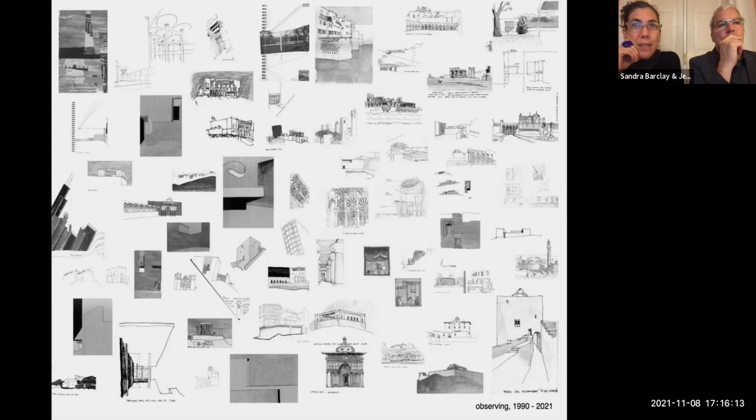Our first ingredient, that is culture, is the reason of meaningful experiences that are integrated in our minds and then arising to our consciousness when doing a project. So our long stay in Europe, we spent there 16 years, and a patient search through drawing helped us create a personal visual culture from experiencing the actual building.

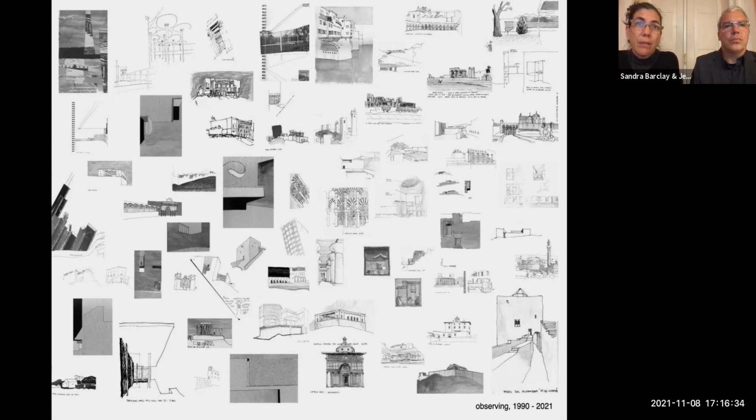So we were creating our culture, and of course the research by the doing is nourishing also our culture. In each project we go from sketches to drawings to models, to precise drawing into the reality, and then back again to sketches, models, and drawings.

So it's a circular dynamic between mind, hand, and matter. This patient search structures the relations between our projects.

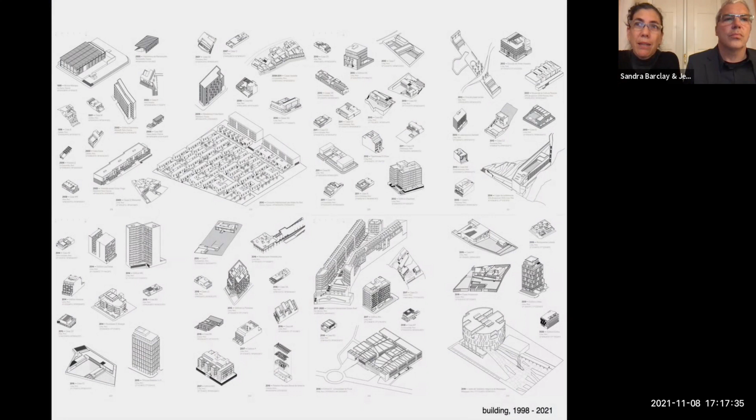The different needs and aspirations from the clients, the nature and scale of the program, the singularity of geographies, climate, and places are essential to an approach that seeks to blur the boundaries between the vast territorial scale and the small detail of an architectural element.

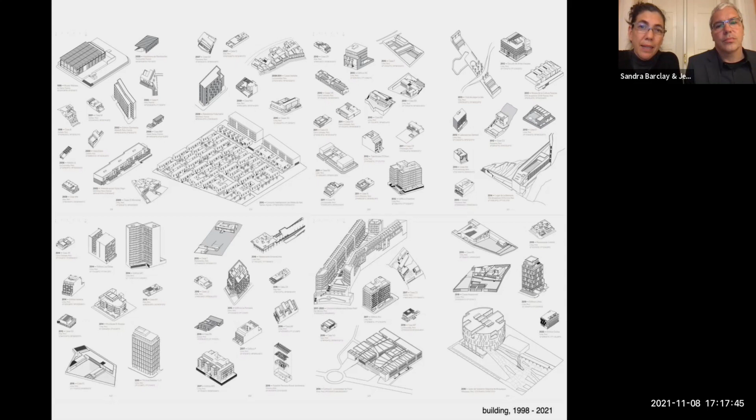These drawings of our built projects, shown at the same scale, constitute our own design culture. We are increasingly asking ourselves if nature, territory, landscape, and architecture can still be seen as interdependent and with the same value. We try to abandon the modernist, rigid separation of the disciplines of architecture, urban design, and landscape architecture, which have become distinct and often polarized professions.

Alexander von Humboldt was the first European to realize that the section, and not the plan, is the only way to understand the Central Andes region, where modern Ecuador, Bolivia, and Peru are located. In Peru, the combination of the Andes and a cold current coming from Antarctica produce a unique tropical landscape.

So we will redraw this section, including the sea current named after Humboldt. We start by a horizontal line that represents the ocean, the west on the left, the east to the right. Then comes an extremely steep topography with a 10,000 meter, or 30,000 feet, gradient in a distance of only 200 kilometers.

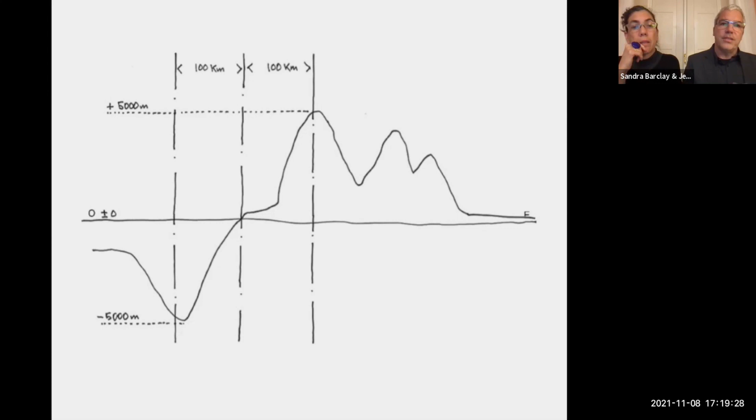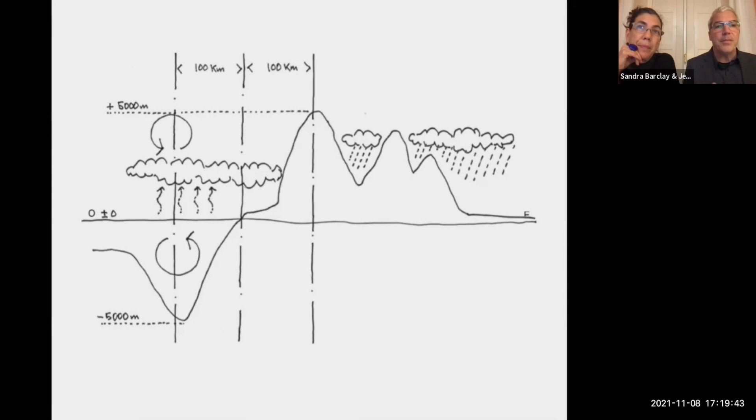These geographical circumstances generate a unique landscape and a unique climate. In the Amazonian basin, at right, climate responds to a normal tropical condition, while at left, in the Pacific basin, a permanent mild temperature and no precipitation at all happens when the seawater convection and an air thermic inversion combine to create an almost permanent cloud over the coastal desert strip.

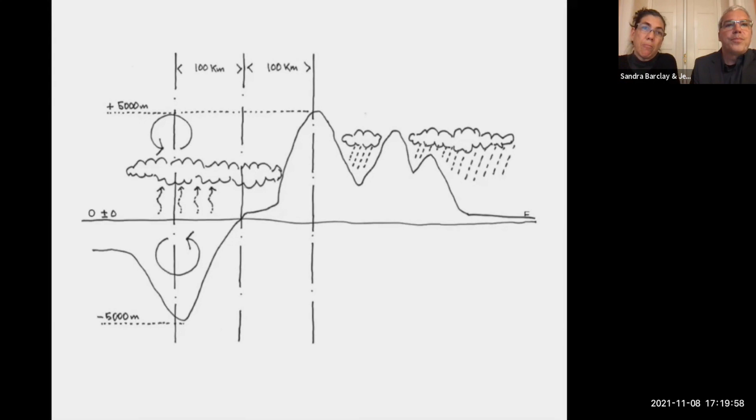And Lima, our city, is placed right in the middle between the abyss and the summit, which we feel even if we don't see them, because of the ocean, of course, and the almost permanent clouds that hide the mountains. We'll show you seven projects that are linked by this section.

They can also be understood by their own section, and we will try to explain them by the sections, because we like to think that if the plan allows to understand distribution of spaces, only the section reveals the wonder of space, light, and time playing together.

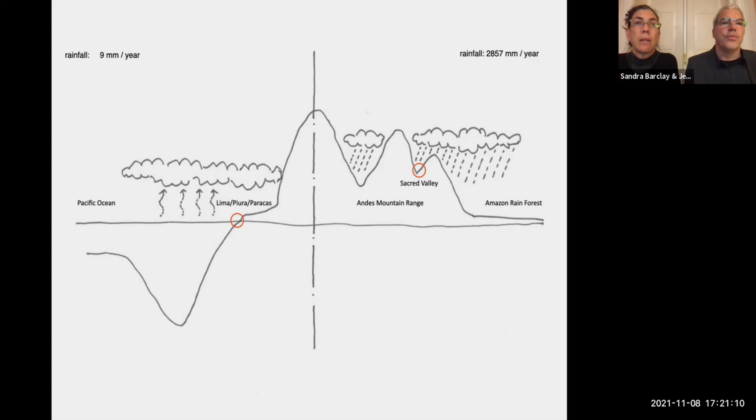So these conditions of this section make our tropic very different from the usual image we have of this latitude. Instead of, in the coast where Lima is, instead of palm trees and white sand beaches that we expect from a tropical setting, we have this extremely arid, but at the same time, yet very humid desert.

And these conditions generate a very mild climate. That is our third ingredient. And climate gives us huge opportunity for redefining architecture and its role of providing shelter. With absence of rains, extreme hot or cold days, no strong winds, we can concentrate our efforts in the architecture's capacity of being generous despite budget limitations, and in the creation of intimacy and well-being.

Space expands beyond the limits of the building, and interior and exterior are not defined by airtightness, but by the relationship between intimacy and vastness.

It is on the edge of the Bay of Lima where we had the opportunity to build the Place for Remembrance. This project is about making a place for reconciliation of Peruvian people, a cultural center that would articulate the efforts of an entire generation to convey to future ones the memory of 20 years of extreme violence that devastated our country and left more than 70,000 deaths. This place has become vital in the aspiration to prevent repeating the errors of the past.

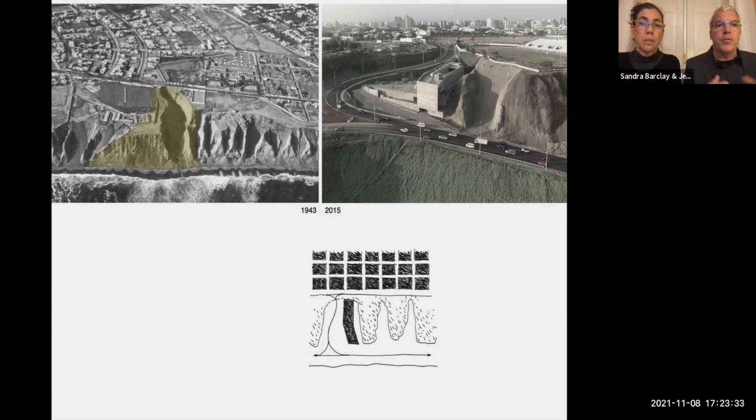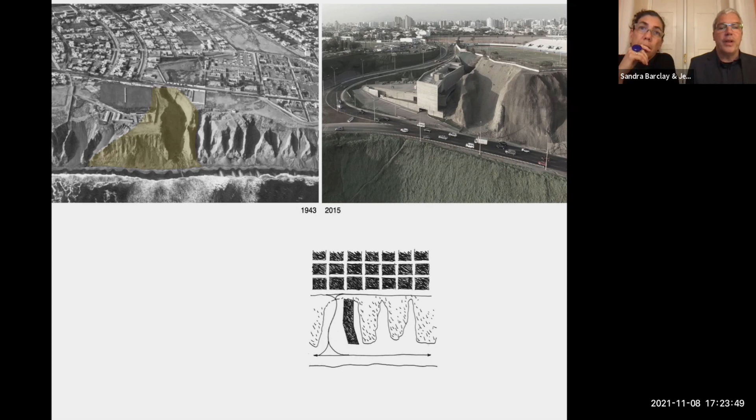The site where we had to intervene was a residual area left by the destruction of one of those successions of cliffs and ravines that characterize the Bay of Lima, when the roadway you see at right was built to connect the beaches with the city. We decided to embed the building within this territorial logic by building an artificial cliff, so our addition would be related to the memory not only by its programmatic content, but by the memory of Lima's landscape. In fact, the building closes a sequence of cliffs and ravines more than 10 kilometers long that characterizes the Bay of Lima.

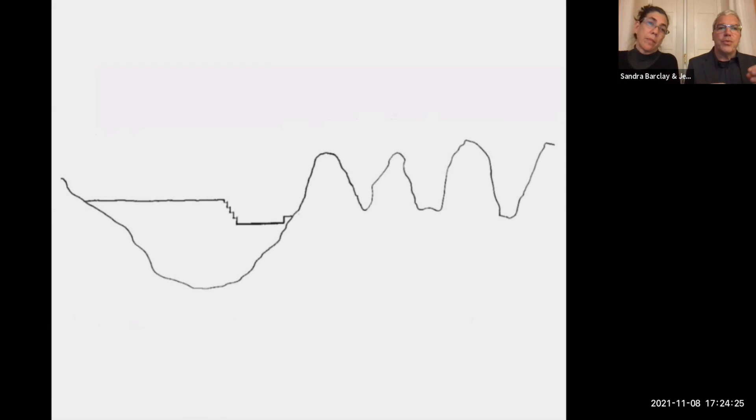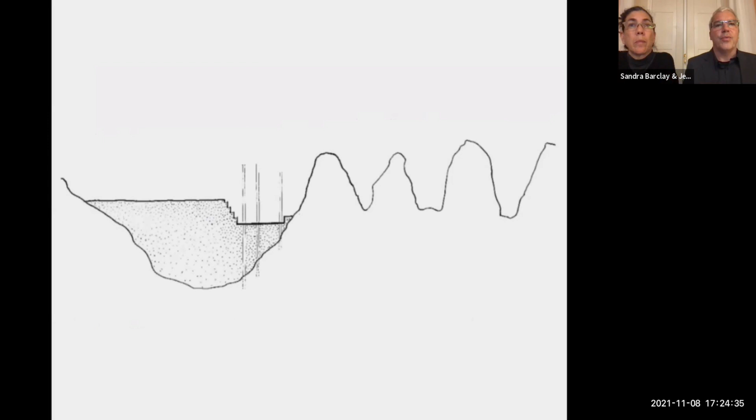That territory is more easily understood by a section, as Humboldt showed us, so we'll explain our project by this section. We drew a cut-off longitudinal section of the cliffs and can visualize the infill made to create the descent to the beach. So we decided to do a compact building near the natural cliff, which allows us to economize on both the number of foundation piles and their depth. In this way, the territorial logic could also meet the economic logic.

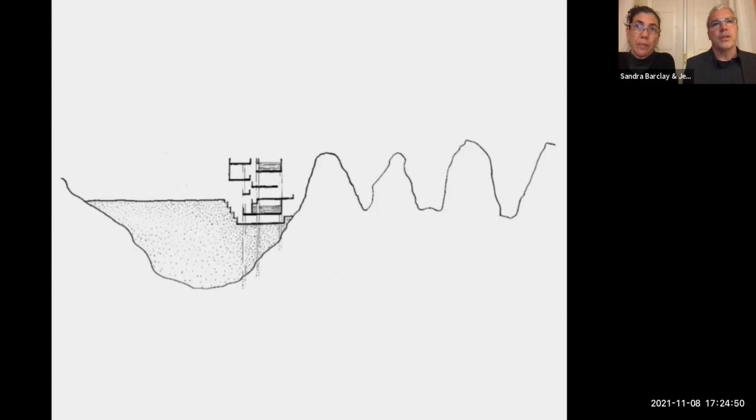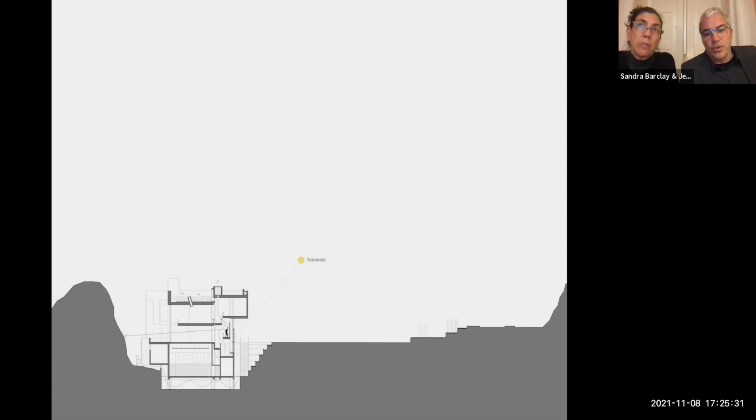This simple strategy opened possibilities for responding to environmental needs. Opening the building to the cliff allowed controlled natural lighting, while closing it to the northwest prevented the sunlight of the setting sun and the noise of the coastal highway. So an open inner space could be created and would function with natural ventilation, limiting the use of air conditioning to the auditorium alone.

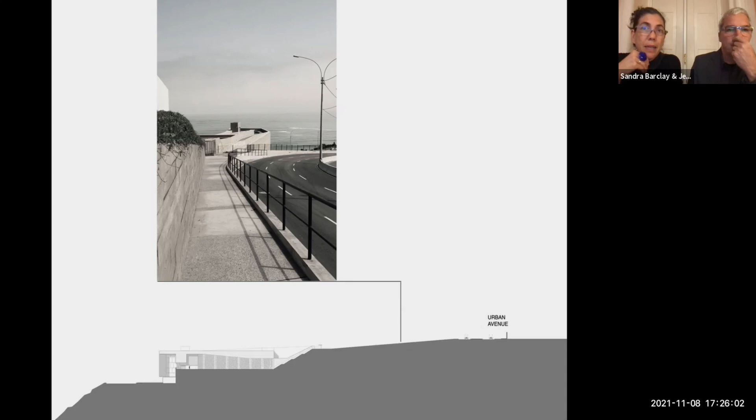The site still had a strong handicap: there was almost no connection to the city. A long distance separated the site from the main urban avenue with public transportation. So we decided to transform this major problem into a design opportunity. We created a narrow passage to introduce time in the way we approach the building. The visitor can take the time to distance himself from the city, leave daily preoccupations behind, and get ready for an exhibit which is not easy to see.

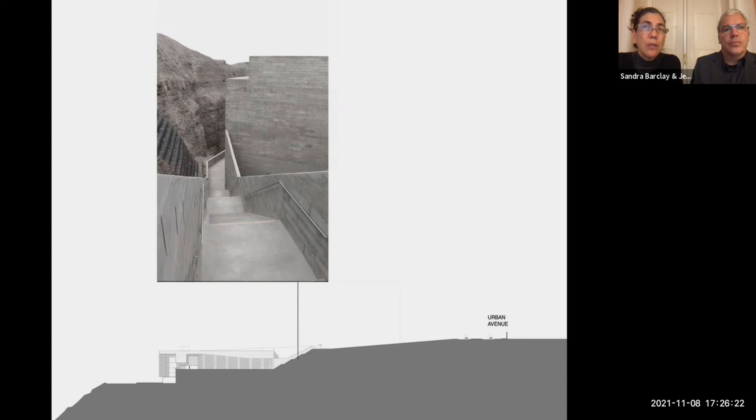The visitor is really submerged in a gap created between the cliff and the building. The act of descending into this crevice turns gravity into a very explicit force, and at the bottom of this newly created ravine there is a marked physical consciousness, a kind of intensified presence. We are no more in an urban setting, nor in a natural landscape.

On the other side of this artificial cliff, the building is defined by a platform that looks over the sea, conceived as a public space for reconciliation.

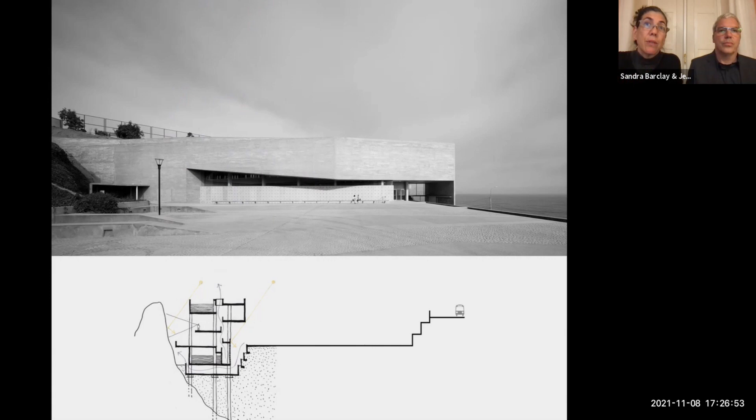The program, our fifth ingredient, isn't of course a list of functions, but the way usage can inform space as a container of experiences. So the experience of space through time is essential while we walk through the building.

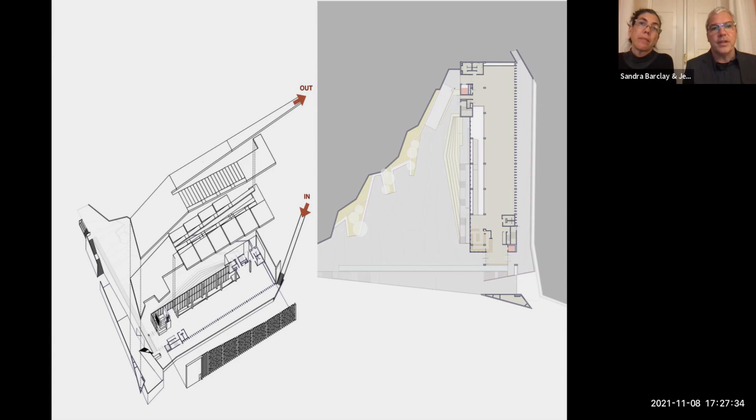The different exhibition spaces are accessible through a series of ramps inside this very rational building, climbing from the bottom of the ravine up to the rooftop, where visitors go back to the city. So in this museum, the hall and gift shop are not the meeting point between those who get in and those who get out, but the city itself. It was very important for us to do that.

The ramps also helped to slow down time in the interior, separating the path of the eyes from the path of the feet, so we can have a complete vision of space while climbing. This way, the experience of space in time is enhanced.

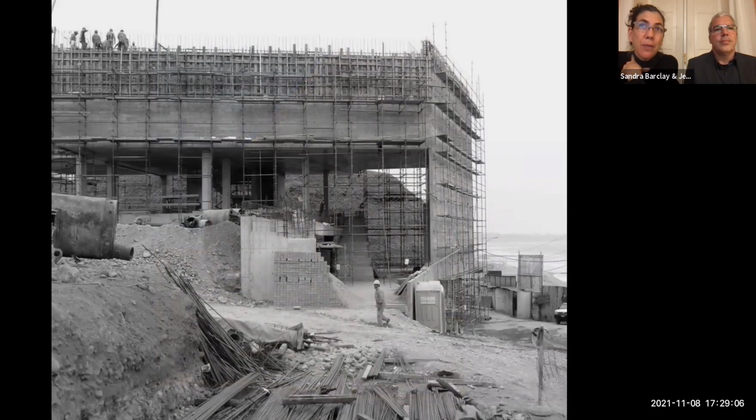Technology, our sixth ingredient, is defined by what's available in the place we are working. Craftsmanship and limited resources are what we have at our disposal, so it makes sense to combine them, making the handmade imperfection our ally. The building process is therefore very important, as the design process does not finish with construction drawings, and the act of building is also an act of memory.

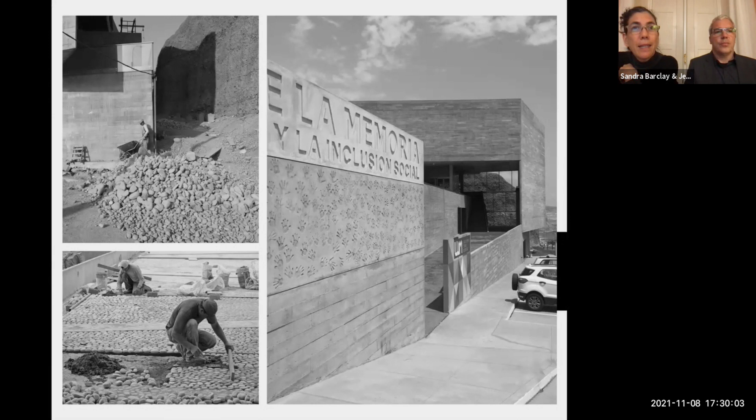The artisanal formwork assembled by hand using old wooden planks, the cobblestone pavement, and the traces of handcrafting are evidence of human labor and become the memory of human intervention. The workers put their handprints at the entry to the public plaza as a tribute to the hands that literally built this place. Now let's see how the building becomes alive.

Sun from the east warms the house in the morning, while the setting sun at right hits the stone cladding of the roof and diffuses heat at nighttime. So here we can see the terraces, the roof, the framing of the lower part of the valley.

Not far from there, in Moray, we won an international competition for designing an agricultural research center and lodging. Moray is considered an Incan agricultural laboratory for adapting plants to higher altitudes. This was for us an opportunity to propose a research center that would focus not on agriculture itself, but on managing water resources in the era of global warming.

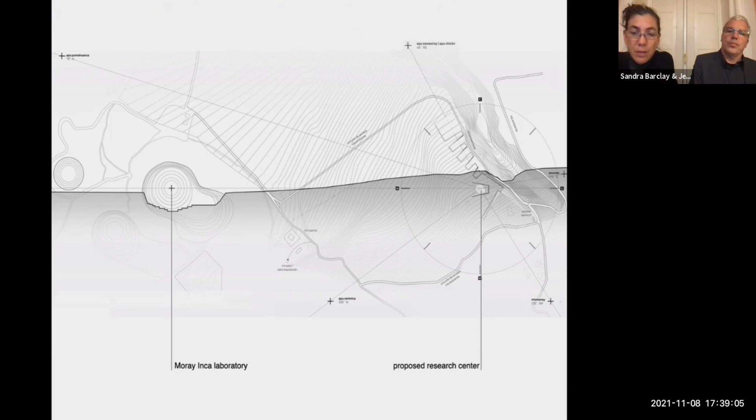So we decided that the project should follow the same strategy the Incas employed, taking advantage of the environment and orientations to create favorable conditions for life. At left, we have the Moray Inca Laboratory, and at right, we have this ravine and our proposed research center at the edge of it.

So we downscaled the ancient infrastructural systems for water retaining, such as infiltration canals, reservoirs, and terraces, to the architectural scale in order to collect water and use it during the dry season. The combination of the different systems defined the intervention on the site.

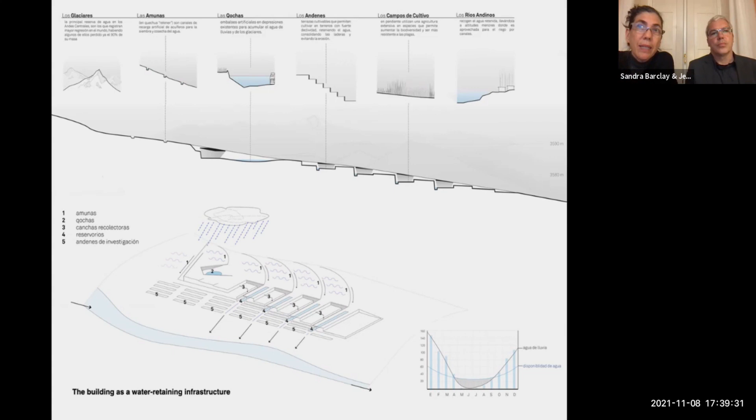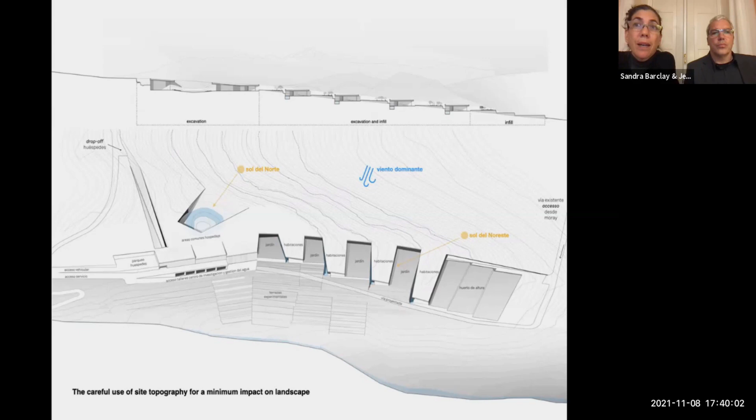A careful use of the site's topography, combining excavation and infill, which we can see on the section in the upper part, allowed us to take advantage of an existing ravine and slope for bringing natural light to all spaces with minimum impact on landscape. The laboratory has a view over the ravine, and the social areas gather around a water reservoir, or qocha, as we say in Quechua.

So let's go back again to the other side of the Andes, to the Paracas Desert, one of the most arid deserts in the world, but also, unsurprisingly, inhabited for centuries. Paracas people lived there like 2,000 years ago, and were the predecessors of the Nazca people, the ones who traced the famous Nazca lines.

The Paracas Archaeological Site Museum was destroyed by a strong earthquake in 2007, and the European Union financed its reconstruction and launched an architectural competition the following year. We had a very meager budget and a sublime landscape as the main ingredients for this project.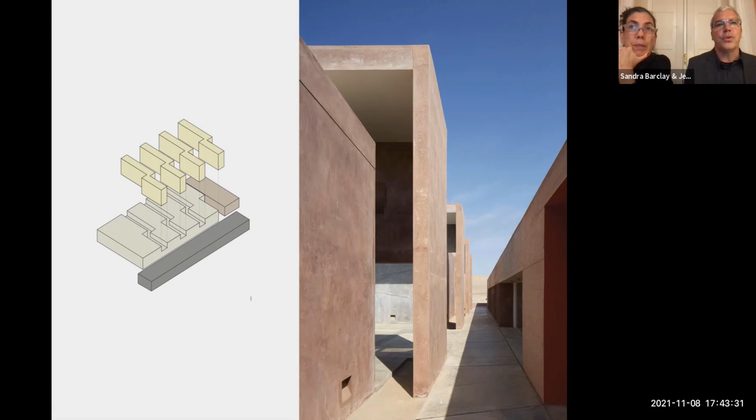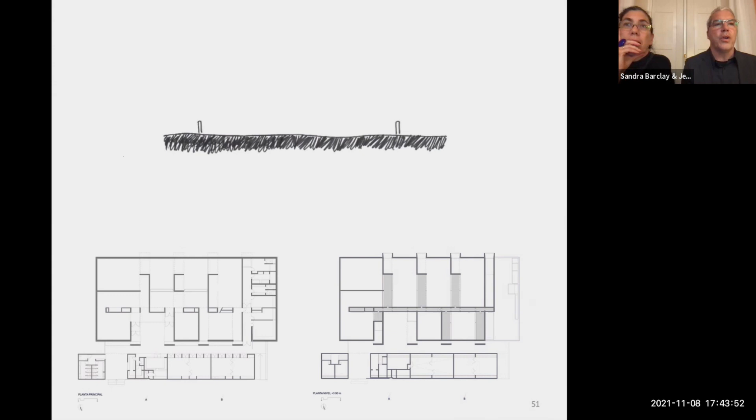So a single-story building has a rational plan and a labyrinthine space common in pre-Columbian architecture. In the plan, you can see the gray suspended structure that we call the environmental device. These elements define the roof, considered a fifth facade.

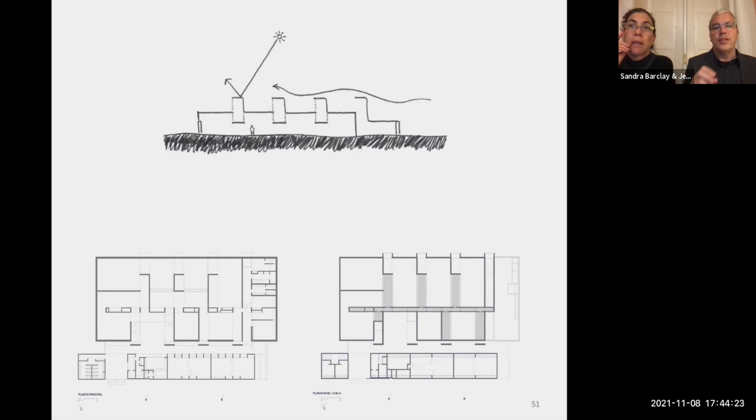As an element, the roof can protect us from the sun and the strong winds of this region. Finally, a series of low-tech environmental devices find their place beneath the roof and help define the exhibition spaces. They help control natural light and ventilation, and will be able to receive more technological equipment if necessary in the future.

This museum is in a very remote place, and it has no artificial lighting at all. So when the sun sets, they close the museum. So a big effort should be done to have the right amount of natural light for the exhibition.

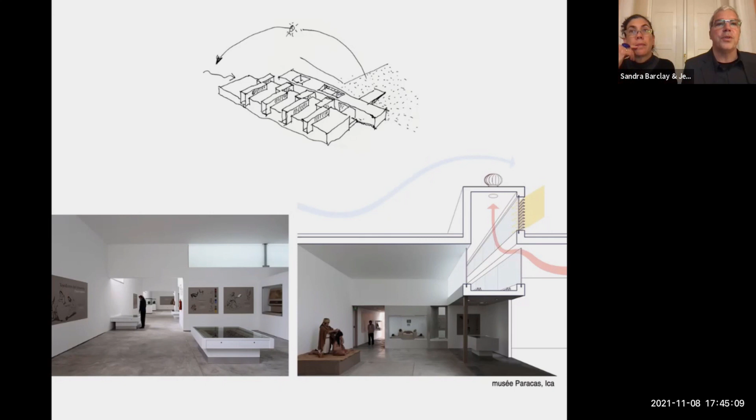The devices are also structural elements, and when they reach the southern facade, they become windows that are framing the burial sites. The exterior is finished with the same polished ceramic technique used for finishing pre-Columbian vases, rescaled to the size of the building.

We used a natural reddish cement that is pozzolanic, and we hand polish it as if it was a huge ancient vase. This color is obtained only by the color of the cement, which has a lot of ferrite, and it oxidizes, it rusts with the air, so it acquires this magnificent color.

So in a climate where rain is nonexistent, circulation can be open air, intermediate spaces that flow between volumes. The same strategy can be applied to an urban house project, and in Lima, we did it. We were asked to design a house in a typical urban plot, 15 meters wide and 35 meters deep.

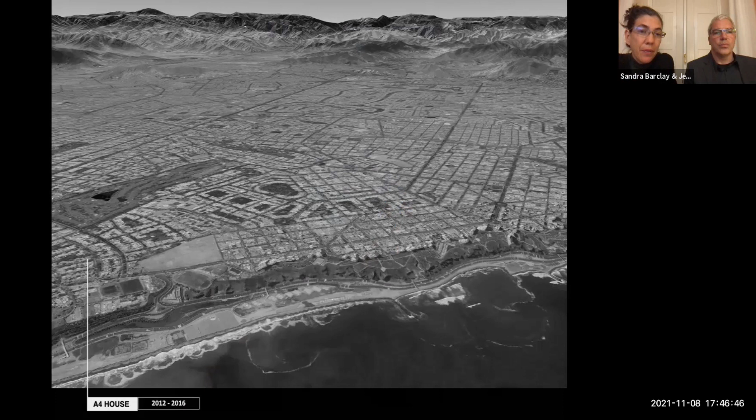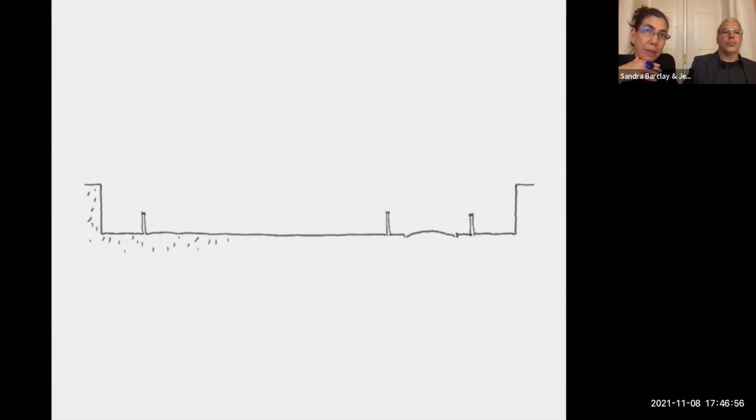We decided to create our own landscape in the confined space of the plot, with the back neighbor at left and the street at right. We then defined the limits of the plot, mandatory in the urban regulations. We introduced open-air features such as a pool at left, a pond at right, and gardens planted with trees.

In between, a series of 3 vaulted bridges spread over the width of the plot. These bridges sustain the program of bedrooms and intimate spaces, leaving the ground floor completely fluid and open, revealing the microcosmos within. So from the street, the house doesn't reveal its interior.

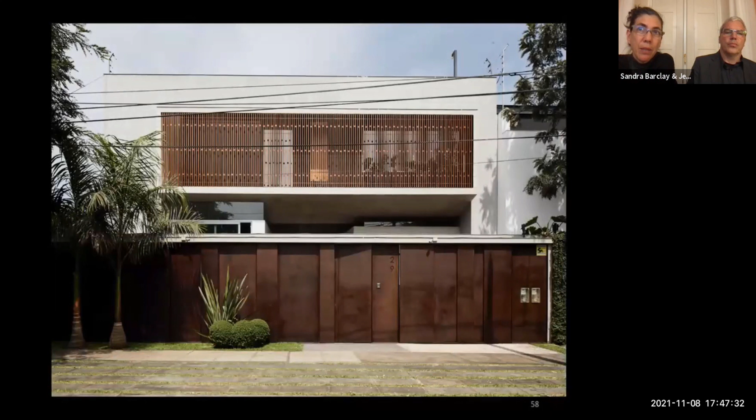The first vault bridge acts as a threshold between the street and the interior landscape. Once you cross it, space suddenly unfolds. We discover a world where interior and exterior blur with reflection and transparency. The space expands through the vaulted bridges, liberating the boundaries between house, garden, and pool.

Living spaces unfold seamlessly between gardens, while on the second floor, the vaulted bridges are linked by suspended metallic walkways. So this is the last exterior space.

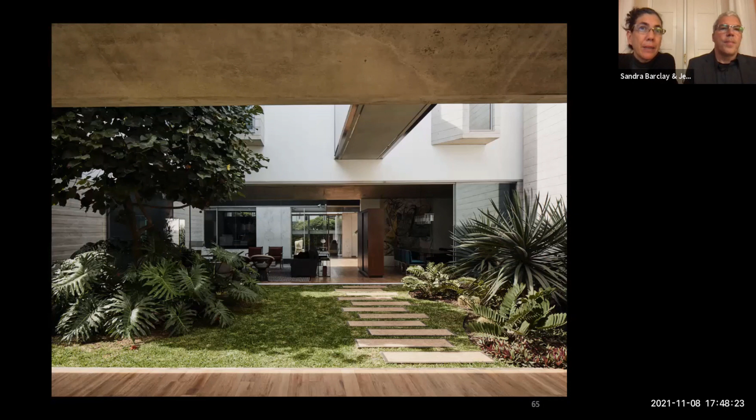Not far from here, we were asked to design a restaurant where we were told to do a project that would synthesize Lima's architecture paired with very good Liman food. So the strategy was similar.

We thought these aspects of climate, of absence of rain, gray sky, should be at the core of the project, taking into account also the noisy Metropolitan Avenue crossing the neighborhood.

So the typical introspection of colonial and pre-Hispanic residences, and their lighting and ventilation devices, were very useful for this project. Enclosure helps to create here a quiet place.

5 modular volumes are supported by the enclosure, organizing a series of indoor exterior spaces. The modules host different functions, and the spaces in between create a fluid space where a more informal atmosphere is proposed.

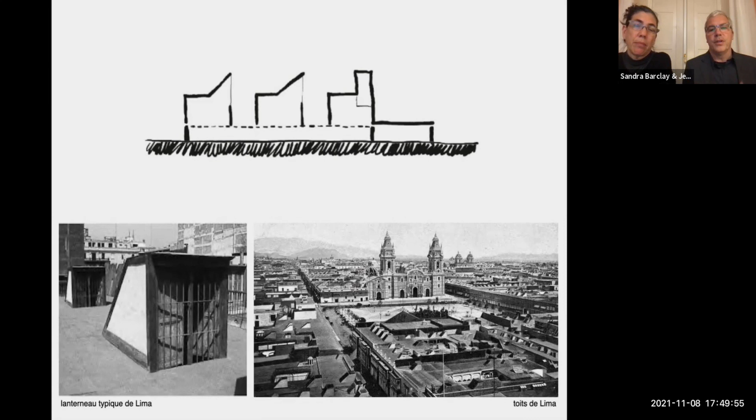The intermediate space is alternately compressed and expanded by the asymmetric arrangement of these 5 modules, producing the quality of an intimate urban space, or as we call it, the exterior indoor, where Lima's white sky becomes like a ceiling.

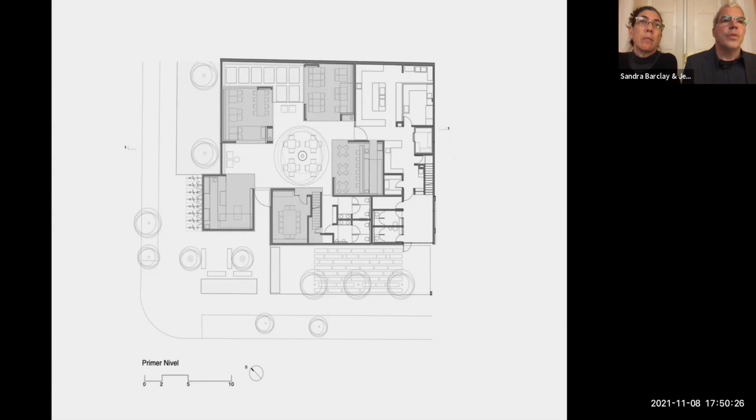From the street, the building appears quite opaque and introverted, and only the skylights give us a hint of what will be discovered inside.

And we get in by a gap between 2 modules, leading us to a protected indoor exterior, as we were saying.

Each module defines a precise space, a different kind of culinary experience. We sit differently in each place, but at the same time, all of them open up and merge with a completely open exterior space.

And when asked for designing a lecture building in the Peruvian Northern Desert, we found it was relevant to apply this discrete building scheme and bring it to a very different scale and with a very different intention.

In the city of Piura, 1,000 kilometers north from Lima, and only 4 degrees south from the equator, the local university needed more space for welcoming a new student population from low-income rural backgrounds, able to pursue their education thanks to a government scholarship. In 2015, Piura University accepted 700 of these students, so new facilities of generic classrooms and faculty offices were needed. Their aspiration was to take this opportunity to improve teaching infrastructure and go beyond a standard response to this need.

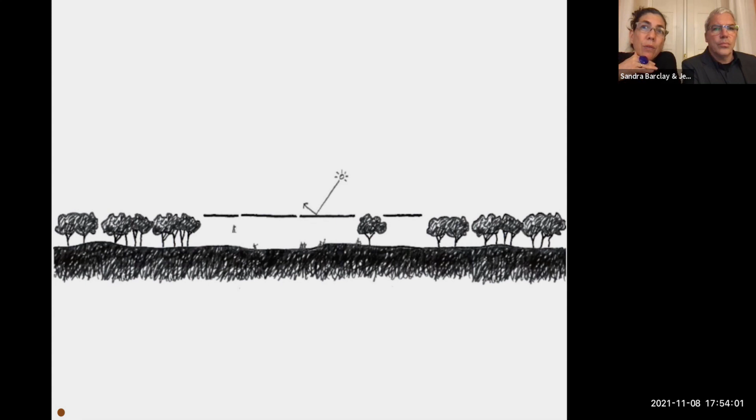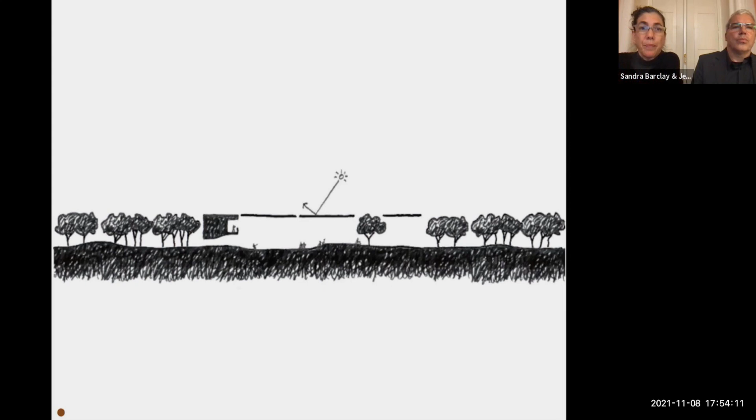Again, the section can help us understand the project. So we start drawing the soft hills of the tropical dry forest, then the planted carob trees, and the clearing left for future buildings. We start by extending the shade of the forest at the place of the building. A single horizontal line is created to define a shaded space capable of creating good conditions for learning. Then the program grows, as in La Tourette, from the rooftop down to the ground. The result is a series of buildings which are less important than the spaces left in between them.

So these are the places for informal learning, the creation of non-hierarchical in-between spaces for students to study, eat, connect, and discuss together outside the classrooms, contributing to create a sense of community.

And we had these two very different populations of students that we had to deal with. So for us, social and economic boundaries should be blurred between the newly arrived rural students and the local urban ones. That space was the space in between buildings.

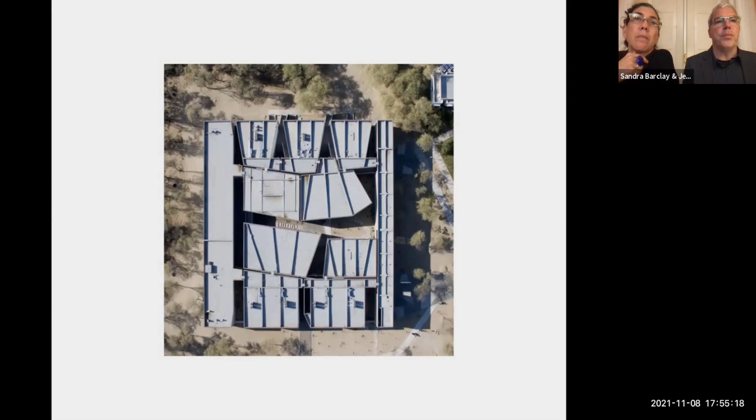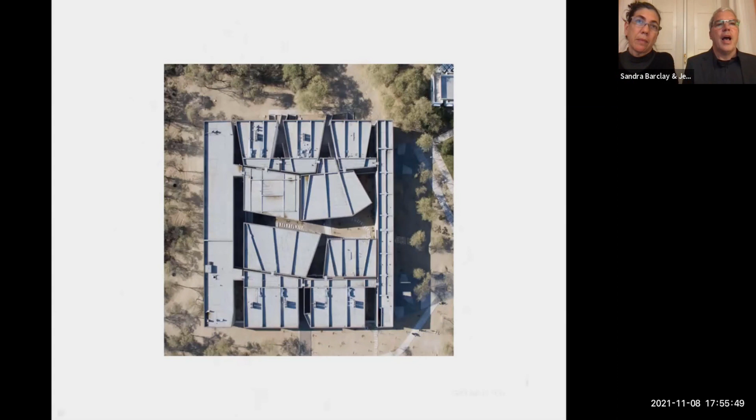As in the dry forest, where the single tree is not more important than the whole, 6 different building types form 11 independent structures disposed in a regular volume of 70 meters by 70 meters and 9 meters high. This apparently compact scheme shelters a permeable shaded space.

Each single building responds in shape and form to its use as an amphitheater, a workshop, a faculty office. And the regular functional shape defines at the same time a multiplicity of irregular in-between spaces.

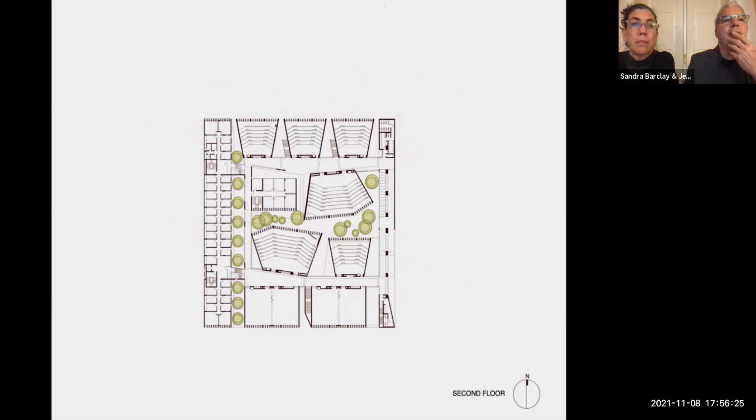Being perfectly oriented to the cardinal points, the natural cross-ventilation from the southern winds makes air conditioning unnecessary, therefore reducing energy consumption. The complex is also not only permeable to the wind, but to the people, and has access from 3 sides, so that it becomes a shaded crossroad in the campus.

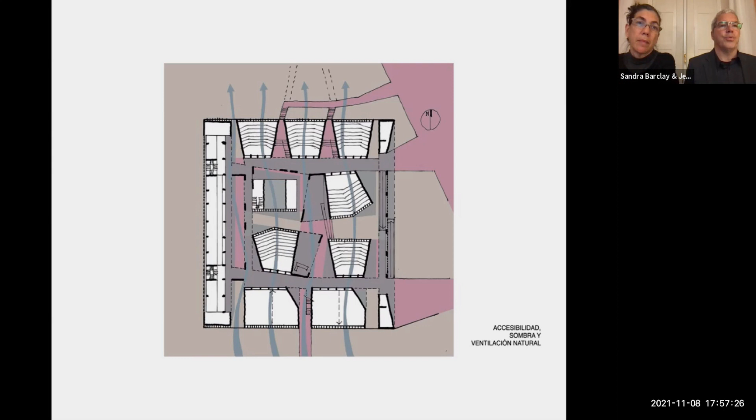Today, at a given time, almost 40% of the people in the complex don't have classes in it. So it has become a place to stay, to meet other people, and have informal conversations. We were inspired at the beginning by the forest, but it has become, in fact, a busy urban space in the campus. Following the logics of an oriented building, the south and north sides are protected by vertical louvers, which are very efficient to protect both facades at this latitude.

In the west facade, a system of prefab concrete panels protects the faculty offices from the setting sun. And the east side building faces the access from the campus pedestrian pathway and hosts the ramps that connect both levels.

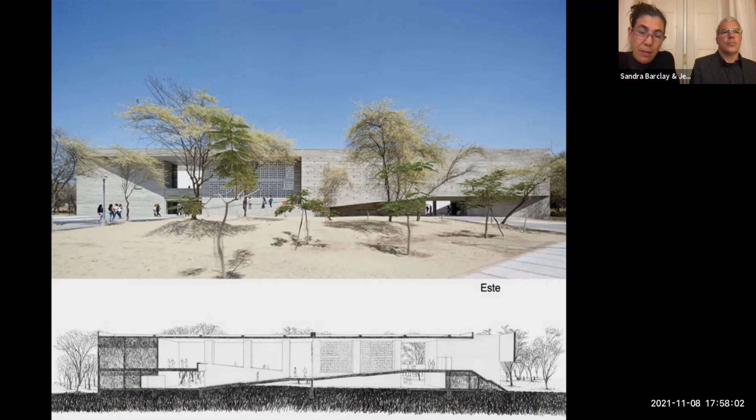The entrance building is in fact a threshold where we pass from the strong glare of the equator to the shaded exterior spaces of the learning landscape. The lattice shuttering, these concrete prefab panels, serve as light modulators in order to accommodate our eyes to the shaded half-light spaces while we go up through the ramps, through the stairs, or just entering the building.

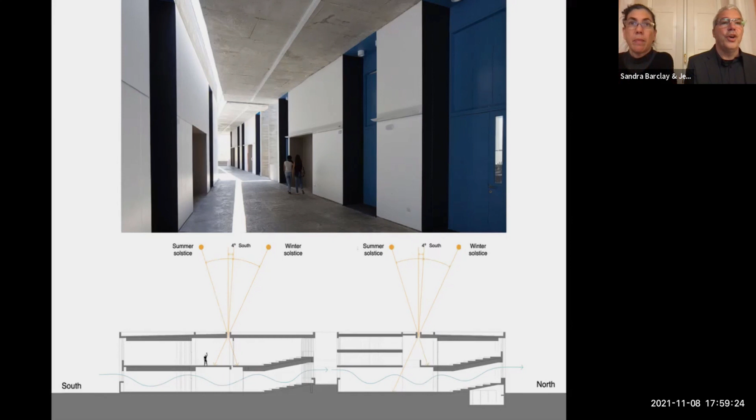And the narrow gaps that single buildings leave between them help the light come into these exterior-interior spaces and favor natural lighting and ventilation. Because the building is oriented with the cardinal points, the gaps are also oriented, and the ones oriented east-west are in fact calendars that register the sun's inclination throughout the year, while the others, oriented north-south, are sun clocks that register the daily movement of the sun.

There are, all through the building, spaces where people can gather, rest, or chat in between classes. Spaces are modulated to favor different kinds of gathering, even an informal class. As we get into the complex, these spaces become more important until we arrive at its core, where the intermediate spaces are crossed by a stretch of the tropical dry forest.

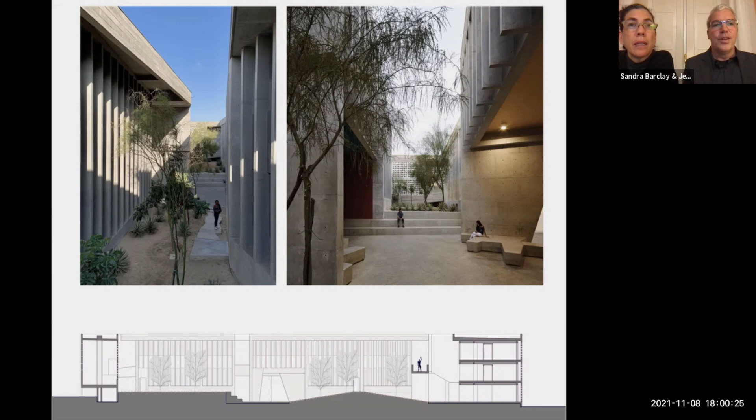So let's see now how a normal day goes by in this building. We will show, in 3 minutes' time, a whole day.